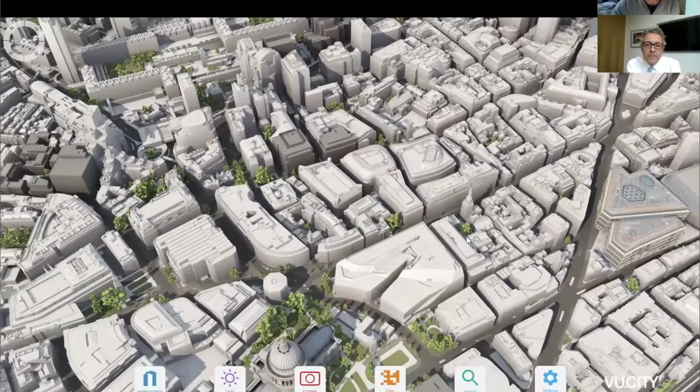VUCITY, for anybody who hasn't seen the platform, is actually a full digital model of the whole of London. In fact, we have 20 UK cities built now. We commission flights over the cities using stereo pairs of photography, then we actually model the buildings ourselves. There's no computer algorithms to model at this level of accuracy. We work to 15 centimeters accuracy, both on buildings and terrain.

We do this predominantly because we want to use this model as part of determining change and what change means for our cities. As I move around, you can see the city we've modelled is all of London, out to the M25 essentially. 1,617 square kilometres of London is modelled in this high level of detail, and that's just the starting point, built up over a number of years. We run this in a game engine so it's as fluid to use as we're looking at.

Just as the first lockdown struck, we actually moved onto cloud as well. So if you're seeing a bit of frame rate drop, that's because you're watching me stream from cloud to my computer. But it's nice and fluid now. It means we don't have any technology or hardware barriers to run VUCITY—it's very easy for anybody to access under a software subscription license.

This really is the starting point, and what we want to look at today is: we've got this great model of a city, what does that mean we can do, and how accurate is it? The first thing we do as a team is have a curation team whose job it is to make sure we keep the model up to date.

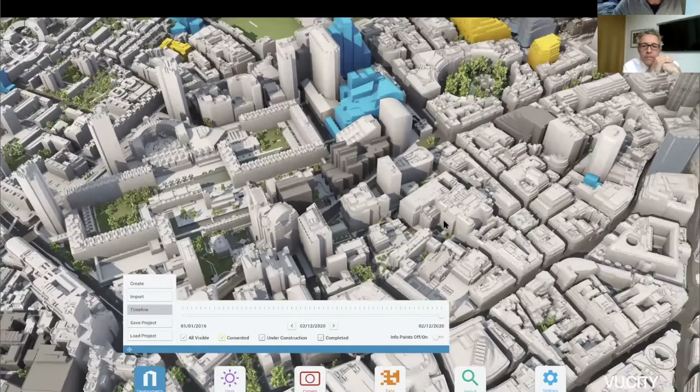As I draw this timeline forward, you'll see lots of different coloured buildings come forward—these are the major planning applications coming forward in London. We're not complete yet, but we're a long way through, with over 2,000 buildings modelled now. The yellow ones represent major applications that have been given consent. They turn blue when they've been implemented on site, and when complete, they go into this dark grey colour. The dark grey reminds us, when we refly every 3 years, that we've established the as-built as the final element to updating the model.

We've got lots of tools we can use in VUCITY—sunlight, where we can move the sun through the model, and measurement tools to look at heights. But rather than take you through all the determining tools we've built, what I want to do today is think about what this means if we were to look at a development site coming forward, which is how we start to link with the Appraisal software that Daniel will talk you through shortly.

So I took the liberty earlier of just looking at the site.

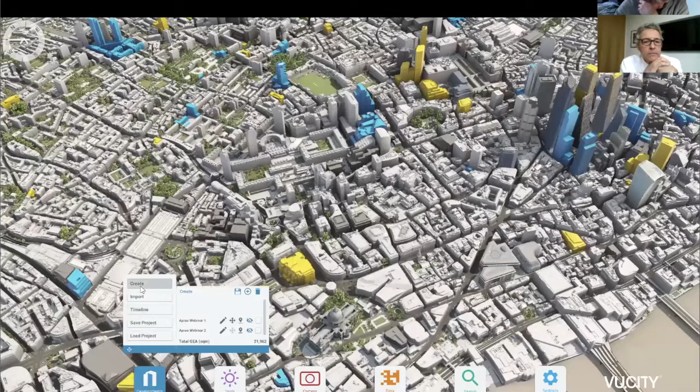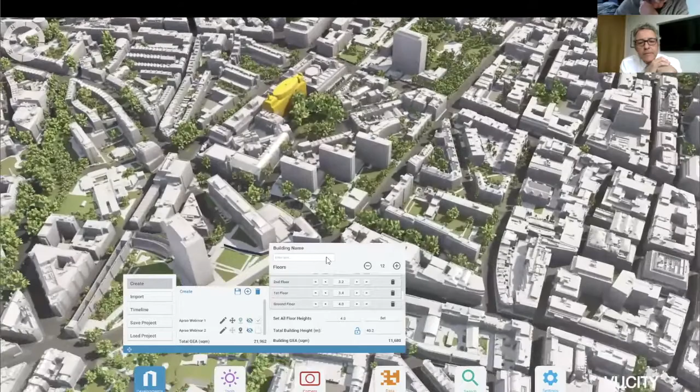It's completely random, so apologies if anybody looks at this and thinks, oh, you've inadvertently clicked on something we may be looking at. There's absolutely no reason to choose this site other than the fact that I wanted to look at the potential of an area that you might think, well, that might be right for development.

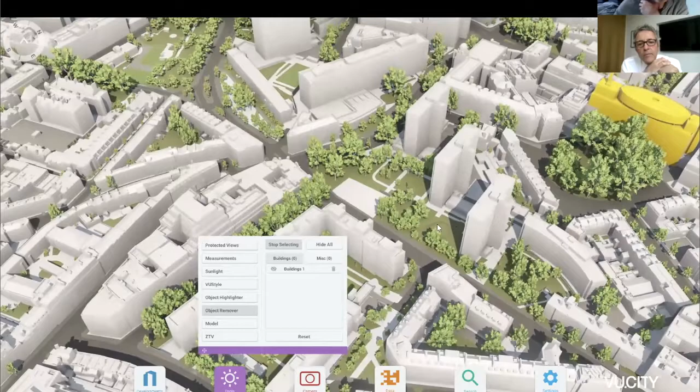So what I've done here is we can look at a building, and I've just got this one centered here. The first thing we can do is we can actually click on that building and highlight it and then hide it. So we've hidden this site now. The reason I chose this, I was just looking earlier and thinking, well, it's got quite a lot of high buildings around it. I wonder if we could get more height on this site and whether or not that would be pertinent to build. And then we have create tools in here.

So really quickly, you can then start to click on any given space and build something new. Just to show you this and how this works, and then you can extrude. So very quickly we could start to think, right, okay, we'll put a new tower on here, and maybe that would be suitable in this area.

Of course, what we really want to do is assess whether any of these things are feasible or not. So there's a number of tools that we can start to look at and see whether or not what we're looking at would make any sense.

The first is that we have all of the London View Management Framework built into the model as well. So if I turn all of this on, we can actually see these are all the protected views to St. Paul's and Houses of Parliament. And this shows us all the views across London that are protected because of those heights.

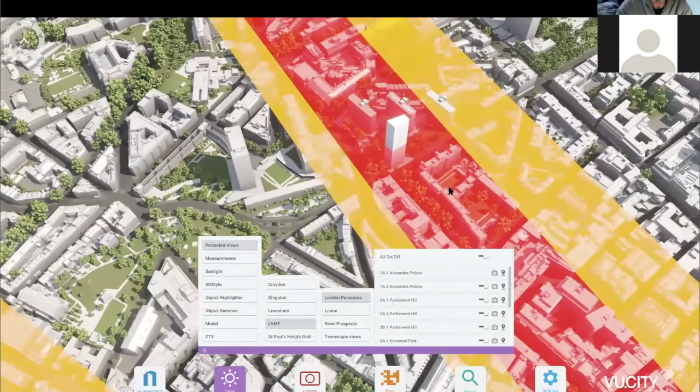Now, you'll see the tower that I've just selected, actually, the first thing that's going to cause me an issue is that it caps the height that we could build to. I can see immediately that I'm going to have issues here because I'm in the viewing corridor.

Just to show you how this would work, if we looked at, rather than show them all, let's just look at this one, which is from Alexandra Palace. If I drop out and we go to the actual viewpoint here, just take a moment for the model to catch up and the streaming to catch up because I've jumped all the way out to Alexandra Palace.

What this is doing is building that view out now with the model all the way from Ali Pali to look at St. Paul's. These are actually, we've surveyed all the photographs and we've taken the photographs from each of those viewpoints. So this is actually the image taken looking across to St. Paul's. You see, it's actually quite hard to define St. Paul's.

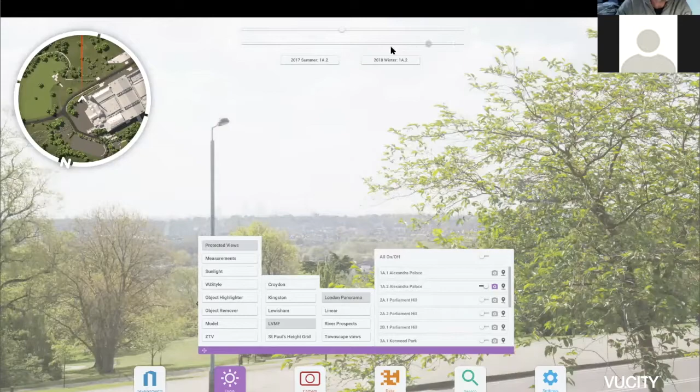But if I come to the other end here and fade the photograph out and we look at the model, we actually start to see the viewing corridor here. But you'll see this tree is in the way.

So I can go to the trees and I can then turn the leaves off as well. So we can now look at this viewpoint without the leaves. It's slightly apocalyptic in terms of all the trees now with no leaves on, doesn't look quite as it would. But the trees, when we create the model, are also captured to their height and their canopy width to give us a level of accuracy to determine whether they're part of views or not.

So this is why turning the leaves off is really helpful, because we can start to think about those winter views. And what we see here, if I start to zoom into this viewing corridor, is you can now clearly see the building that I've been extruding and why it's going to cause an issue, because it's right in the way of this viewpoint to St. Paul's.

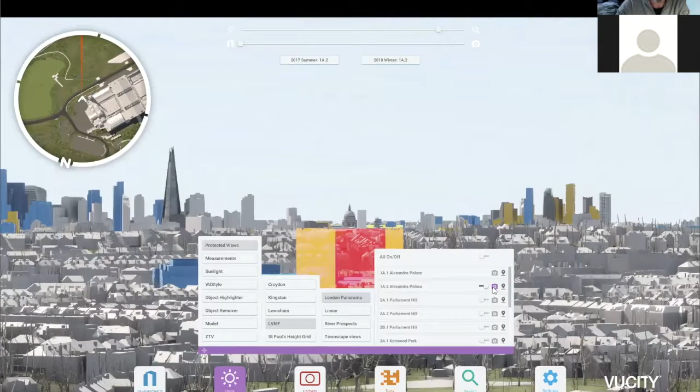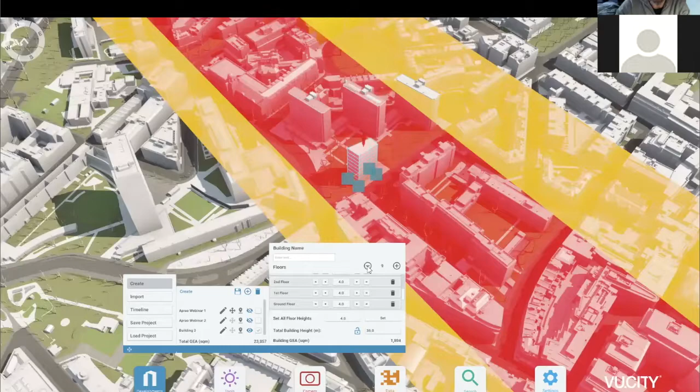So going back to those protected views, let's just jump back and turn that off and come back to the model. The first thing we can do then is say, well, okay, if we're creating this, then maybe what we need to do is to think about the height of what we've just established. So I can then pull this model back down till I'm sitting comfortably underneath the LVMF viewpoint. And you'll see here it also captures the building's GEA.

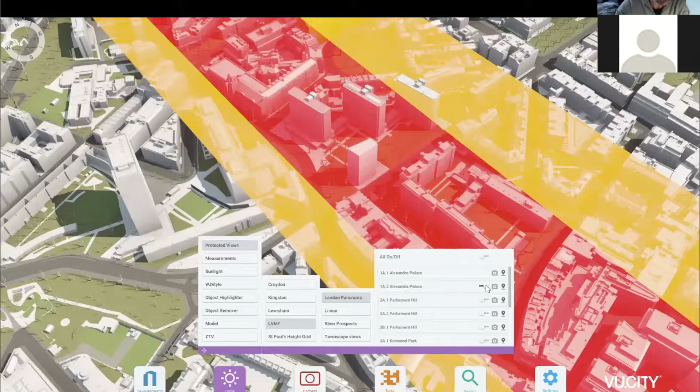So let's just turn the viewing corridor off now because we know we're safe underneath the viewing heights. We might also want to think about if we're building a scheme such as this, where could we see it from? What are the visual impacts in the immediate neighbourhood?

So we've built directly into the platform the zone of theoretical visibility. This allows me to, rather than select views randomly on the ground or at viewpoints where we think we might see it, actually determine where we can see this scheme from. I'm going to run this quickly at low granularity, but we can do this up to 2 square kilometers within the platform.

In fact, any user could do this, and you can change the resolution on the ground from 10 meters down to 1 meter squares. I'll just run this fairly loosely as a first pass. Now, this ZTV used to take days to produce, running some fairly powerful computers. We're now taking advantage of GPU software to generate these.

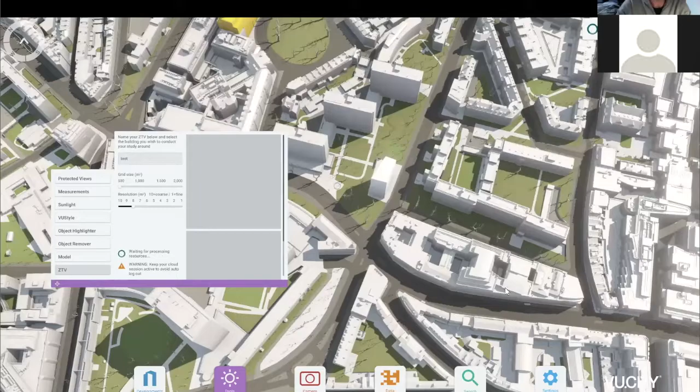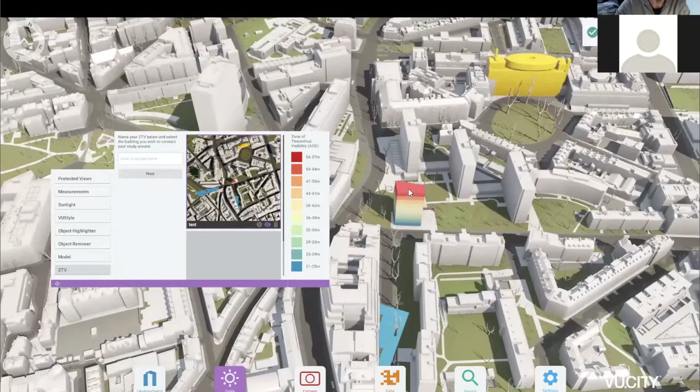You can see it's running the ZTV in the background, which used to take many hours to create at significant cost. We can run those ZTVs directly into VUCITY, and it will establish, as we look, the tower gets graded for color, and it starts to drop onto the ground where we can see the tower from. So ZTV is a really important tool to determine what we can and can't see.

Once you've done that, you can then create camera studies. We can select and choose our building here—I'll just do this as a quick test—select the building, and then from there start to add cameras.

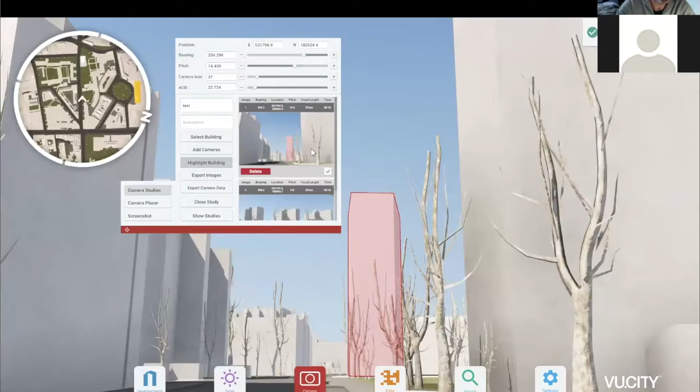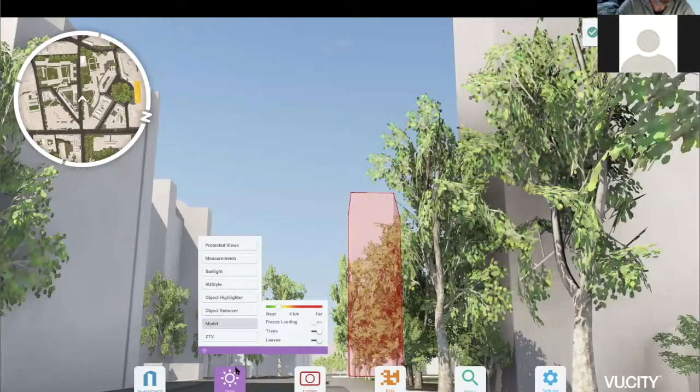So we could say, well, we know we're going to take some of these immediate views from down the street here. I wonder whether we could see it from within this park up here as well. Dropping down to ground, I've now got my viewpoint. I could go back to the model and turn leaves back on so it doesn't look quite so bad—there's the winter view and there's the summer view. Obviously makes a big difference in this location, sitting at street level, being able to see this.

The nice thing here is we can start to determine which of these views would be necessary as part of the townscape and visual impact statement, and how much work we'd then do verifying these viewpoints. So the one I selected in the park—you'll see the little map in the corner shows you where I was in the park—actually shows that from that park, it would be impossible to see the building.

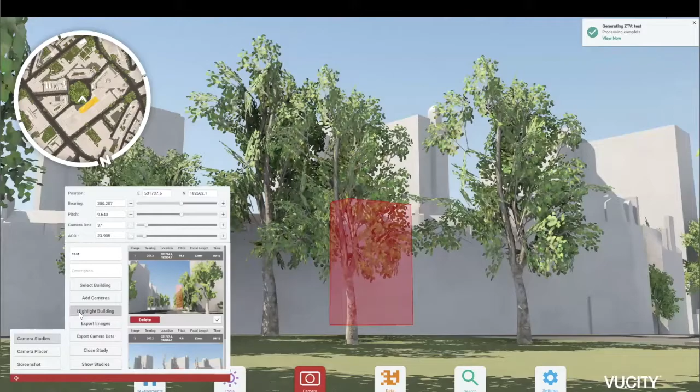So where previously we might have gone and surveyed a viewpoint at expense, we now know there's no necessity to go to this particular park and take this viewpoint, at least in the location we're in. You can still move around, but if I come closer, in this case, I'm going to have less chance of seeing the building than otherwise.

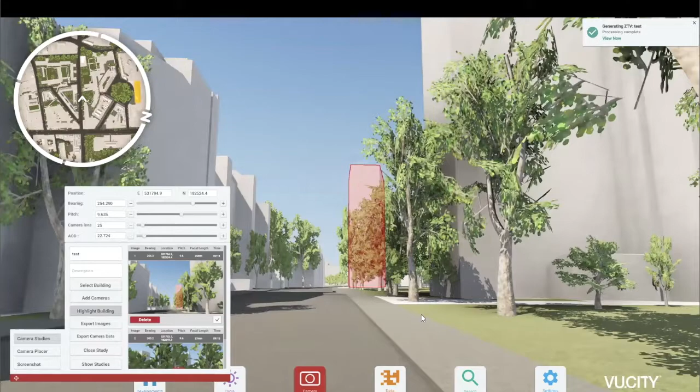And you can change everything in here, so let's go back to this view where I can see it. You can change the actual camera position and location, the pitch—it's set immediately at 1.6 meters above ground, which is the determining height we would usually use for verified views.

So now we've got a position where we understand maybe the limits in terms of heights and views, but also we might want to think about other layers of data before we pass this across as a viable option, to think about costs and things.

We can run a land registry query, so we could immediately query the ownership of the site. I'll just do this quickly—if we click on another building rather than my test building, you see it's actually giving me a red line poly for this entire site, and if I click here it will give me the details on that. So this is a freehold—looks like it's owned by Islington here.

So that's a really nice way, a means of looking at the site, and we can turn buildings on and off within that red line boundary as well.

We might also want to think about listed buildings. We've got links to Historic England data, and you can click here and it will give us the data on, for instance, the nearest listed buildings. In this case, it looks like there's a public house just across the road.

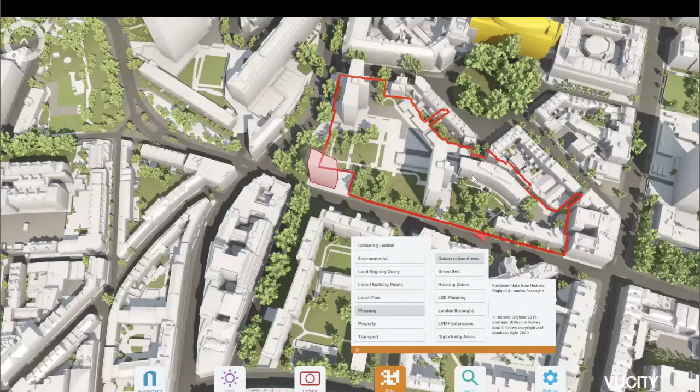We could look at local plan data. We can look at planning data as a whole in terms of conservation areas and greenbelt. So again, useful to just be able to see those. And I can see now we are within a conservation area here, so that's something we might want to take account of.

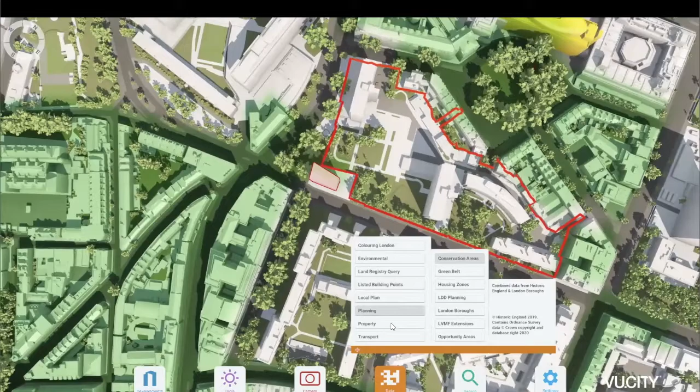We could also look at transport data, things like the PTAL rating, so the accessibility to public transport. I can see here we're in the orange zone, so obviously quite good transport links from here. And if we wanted to see how that sits with the TfL network, if I zoom out, we can then see the network - this is the geographic location of the network rather than the tube map we're all used to seeing when we're on the underground.

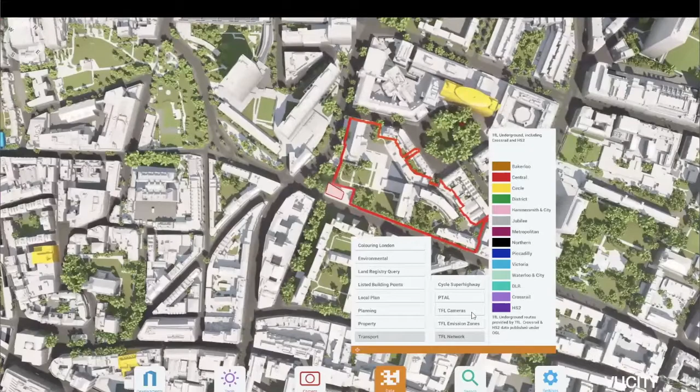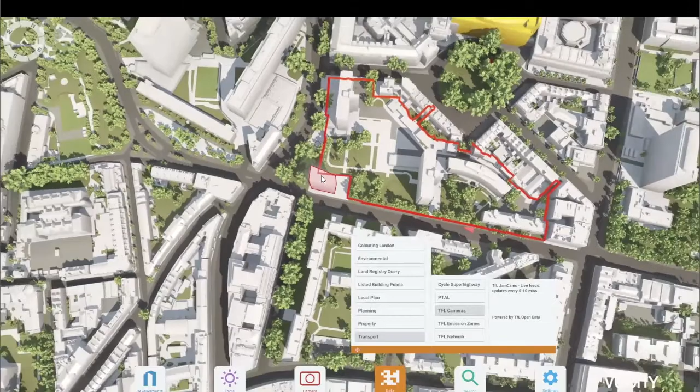If there are TfL cameras in the area, we have links to the TfL cameras. I'm not sure that there's any sitting here at the moment - let me see if I can find a couple just to show. So this is just showing that we could link to live data as well, which is quite useful if there was live data around the site we wanted to integrate with.

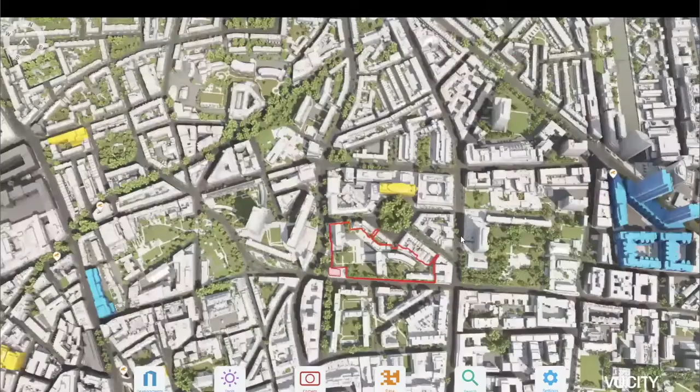But finally, just before I pass across to Daniel, what we really wanted to do was say, okay, maybe we want to optimize the site a little bit more than what I've created here. So let me just turn off that land reg query layer and delete this now to get rid of that red line boundary. So that was my first tower, and it gave me an idea of height, but obviously I'm not really optimizing the site. So what we then might want to do is create a number of schemes, for instance.

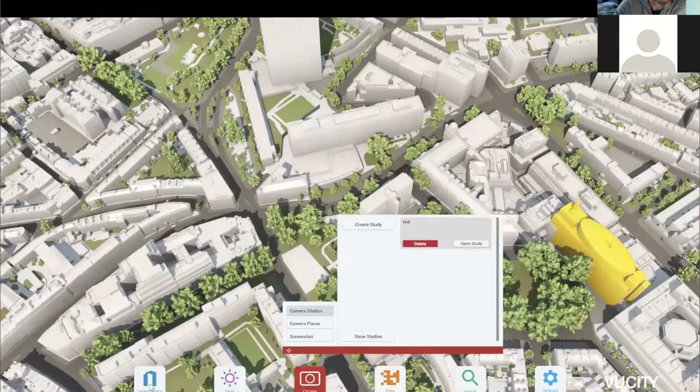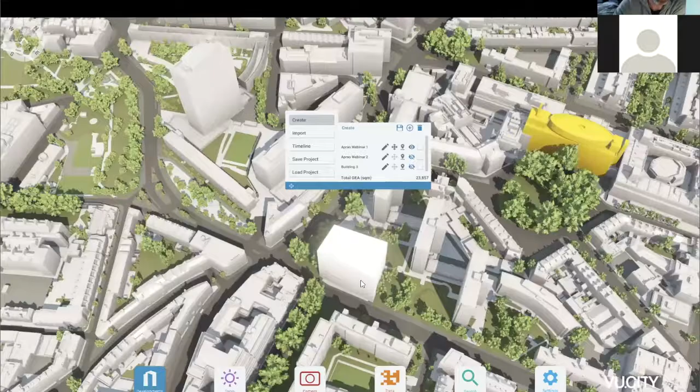So if I turn off this and turn off the camera studies, we're back to our cleared site - the two buildings that I was just extruding and playing with earlier. These are all saved, you can save these within your project, so every time you come back, you can come straight back to the building and location that you produced previously. Just a couple of different options essentially of what we might be able to look at and build on site.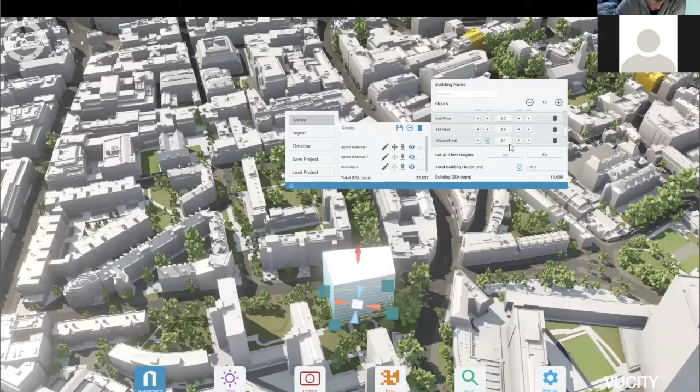If we look at this first one now, what I did here was just change some of the floor heights. Each of these floor heights is possible to change individually, and you can push floors back. But what I thought we could do today is look at if we were to have this as more a commercial space at ground floor, for instance - then it would be useful to think that we could have more height at the ground.

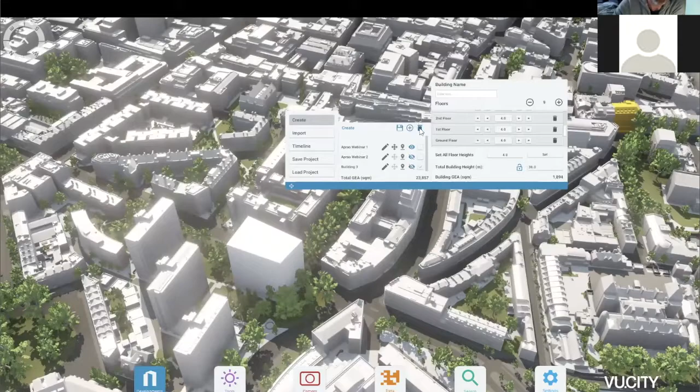So when I was doing this earlier and I ran this, you can see we have GEA - that's actually all of the buildings I've got here created. So if we just delete these, we're left with one building. We can then look at that one building and determine a GEA, and now I've changed it from what I was going to pass to Dan because I've added a floor.

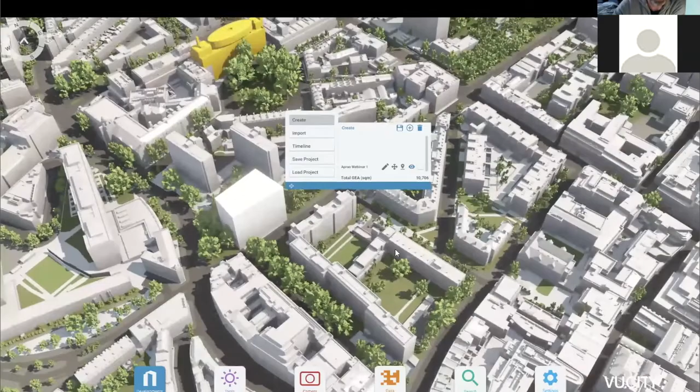So actually, if we then knew, having qualified all of this from all of the different ideas of its impacts on surroundings, and maybe even working with our other partners - GEA, where we could look at GIA, beg your pardon, where we could look at impacts on neighbouring properties from daylight and sunlight - we could hopefully get to a point where we say, okay, this is about the right volume of a scheme on this site. So not getting into the detailed design, but saying how big is this building that we could do here. So we take this reading here of 10,706 square meters of GEA, which is equivalent to about 115,000 square foot.

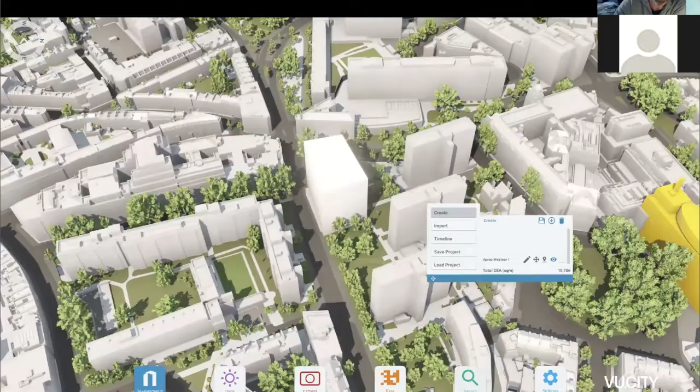And at that point, what I'll do is hand over to Daniel so that he can then share his screen and show you what Aprao would do once they've got that result.

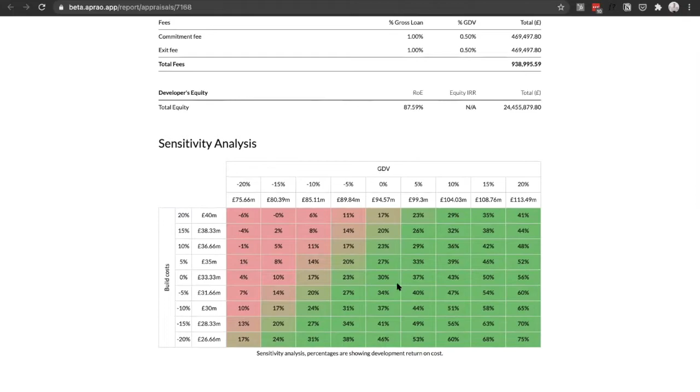So this looks at what happens if the GDV goes up or the GDV goes down on the project, and what happens if the build costs go up or the build costs go down. It's a really nice way to see a heat map of the strength of this particular opportunity.

So this report can be exported as a PDF with company logo on it, or you can also share this report with somebody by going back to the dashboard and sharing a report using link-based sharing, which is a great way to share projects, because the person receiving it can also save a copy of that to their Aprao dashboard.

So the final thing I'm going to show you today is just as an example, how we can quickly run versions of numbers. So we've assumed in this site here that we've got residential and commercial split. But let's just say for a second, we were considering looking at this as a commercial development purely, to understand what the effect would be on the profit and the residual value.

So let's not forget our residual value was £28 million. So what I can then do is come back over to our project screen, very quickly create a copy of that appraisal. So this is our copy. I can rename it to commercial only.

And then in the sales section, what I can do is I can actually remove the two residential unit types. In fact, I can just delete them altogether. And in the commercial, I can take this up to 110,000 square feet. So we've now got our 110,000 square foot. We've got our gross development value here, and that will then feed through.